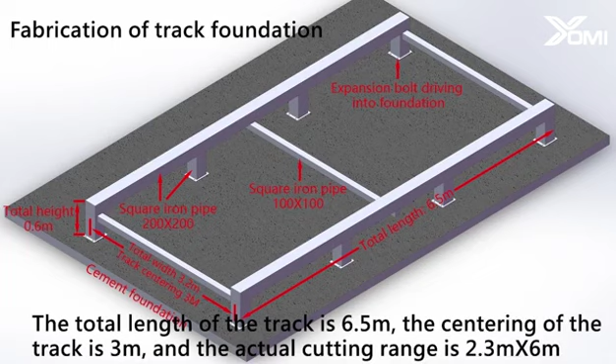First of all, we need to make the foundation of the light gantry cutting machine track. Here, take model 6023 as an example. The total length of the track is 6.5 m, the centering of the track is 3 m, and the actual cutting range is 2.3 m x 6 m. Just do the track foundation according to the diagram.

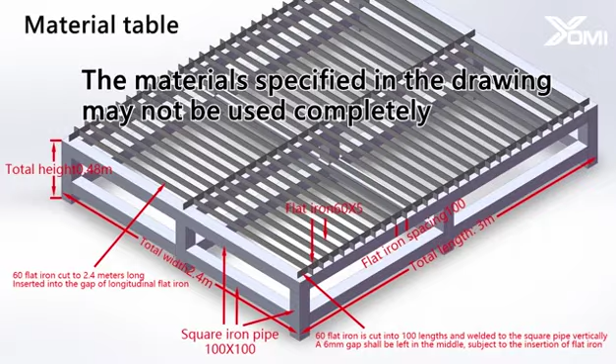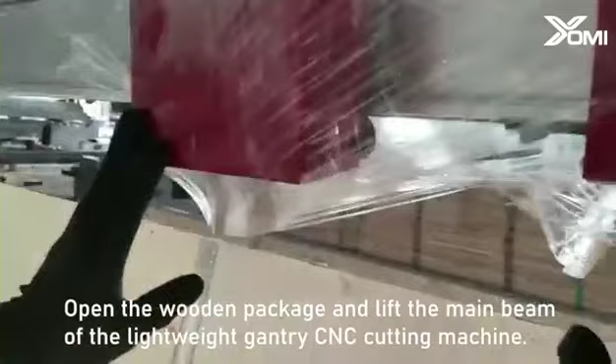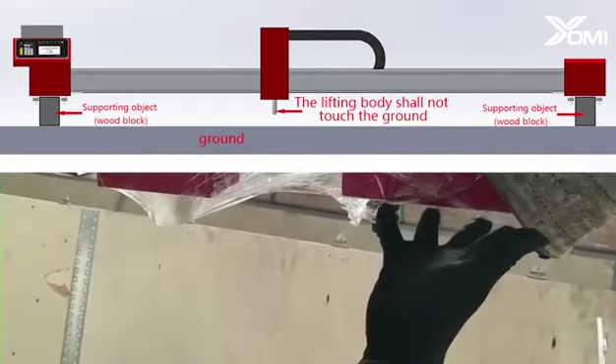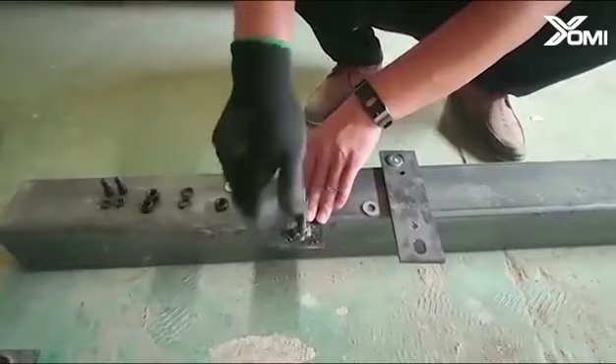Open the wooden package and lift the main beam of the lightweight gantry CNC cutting machine. Place two wooden blocks on the ground to support the main beam. The lifting body must not touch the ground, to prevent touching the parts under the lift and beam. Screw the nut onto the screw of the base. Place the flat pad and then put the mounting board. Put flat and elastic pads and screw nuts. Do not tighten the nut temporarily.

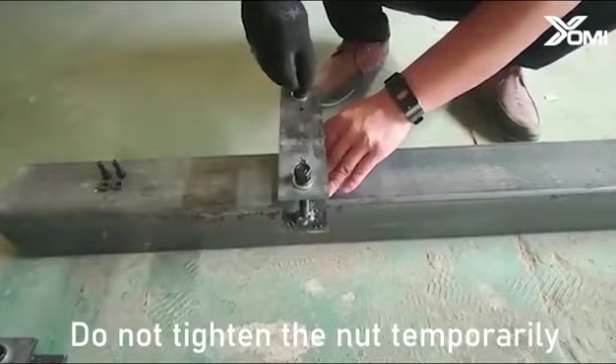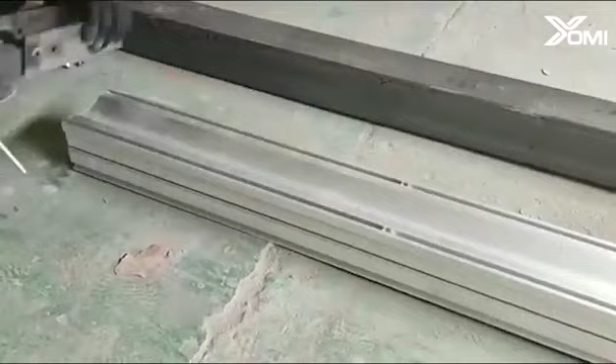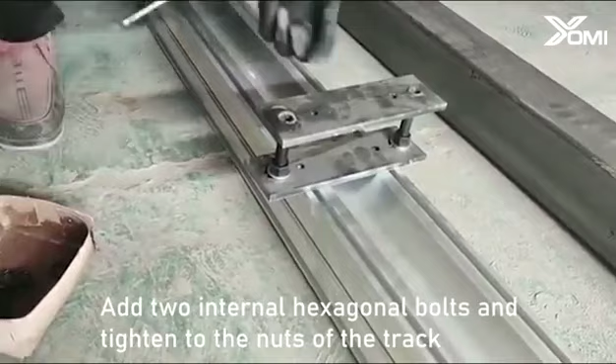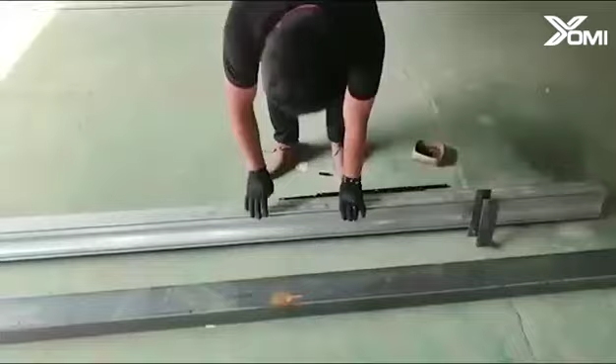Turn the track over. Push the nuts along the gap under the track to about 0.5 meters. Put the movable side of the base down onto the track. Add two internal hexagonal bolts and tighten to the nuts of the track. 3 groups of cushion blocks on each track shall be assembled according to the above method. Turn the assembled track over and put it on the completed foundation.

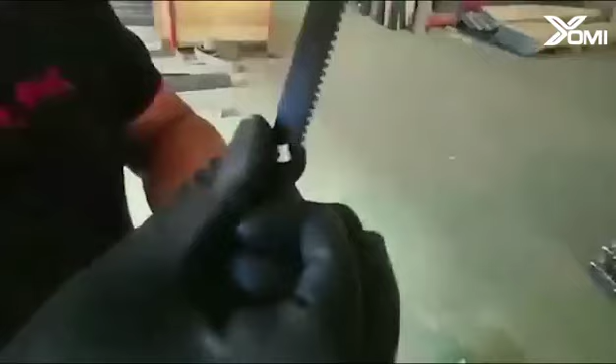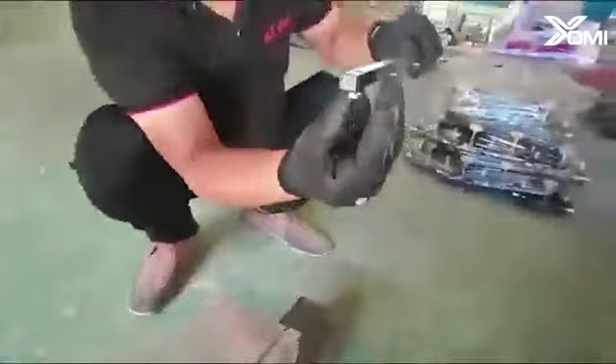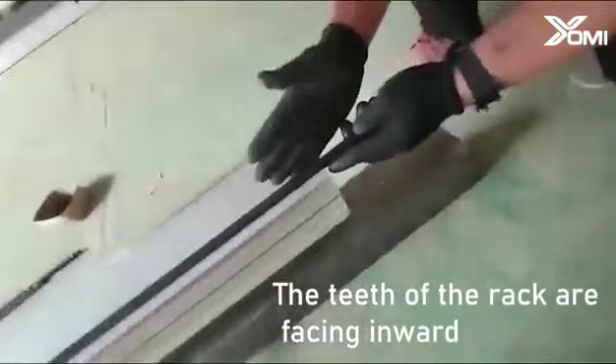Next, start assembling the rack. Release all the small nuts on the rack to the bottom side. Just like this. Adjust the small nut under the rack to be vertical. From here, thread the rack into the track along the gap. The teeth of the rack are facing inward. Assemble all strips as described above.

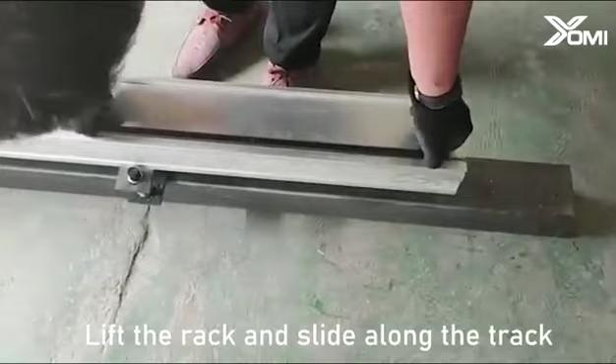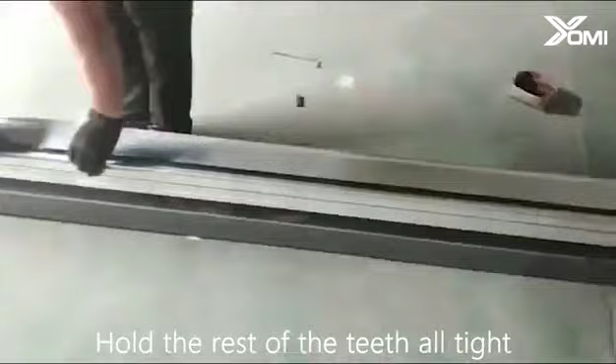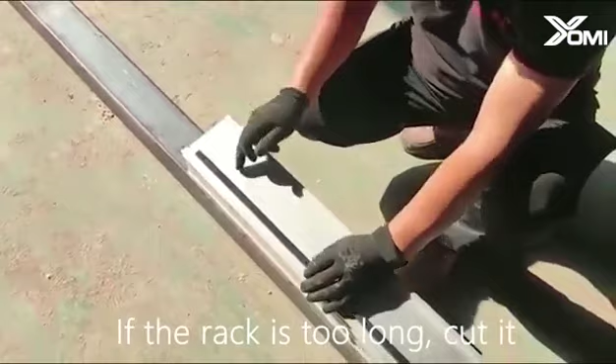Lift the rack and slide along the track. Set aside about 30 centimeters here. Hold the rest of the teeth all tight. On the other side, the rack and the track edge leave 15 centimeters. If the rack is too long, cut it. Press the rack tightly on the track and tighten the bolts on the rack. The rack must be fastened to the track, and each bolt must be tightened.

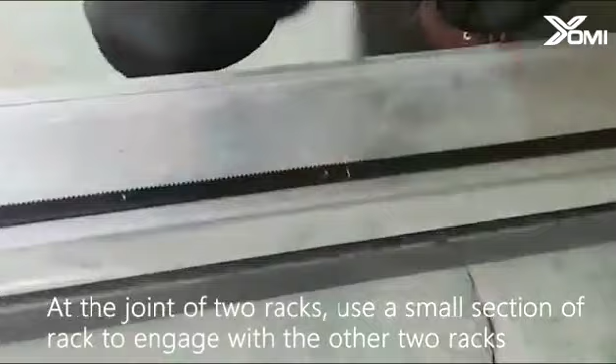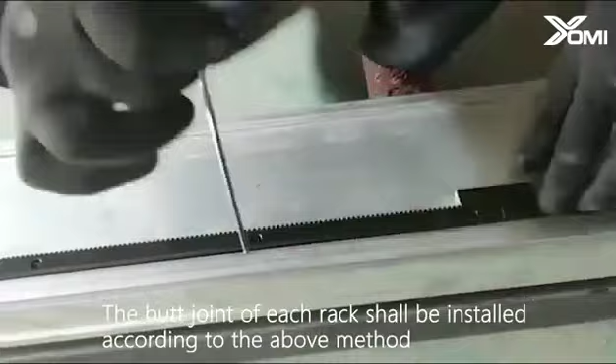At the joint of 2 racks, use a small section of rack to engage with the other 2 racks. Press the small rack and tighten the bolts on the long rack. The butt joint of each rack shall be installed according to the above method. Each bolt on the rack bar shall be tightened.

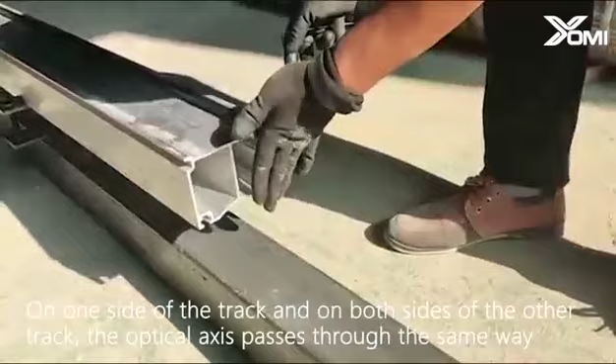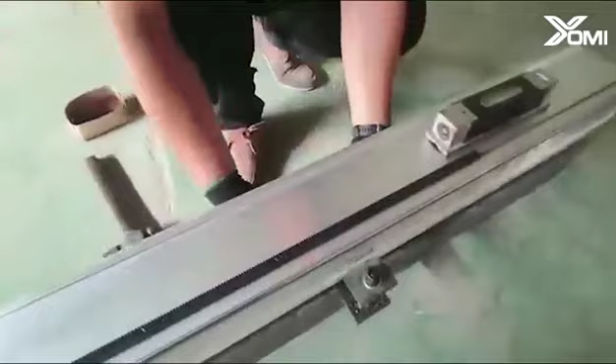The optical axis should pass through this position of the track. On one side of the track and on both sides of the other track, the optical axis passes through the same way. Place the assembled track in the center of the foundation. Weld the base to the foundation. The base on the main track should be welded well, and the base on the secondary track should not be welded first.

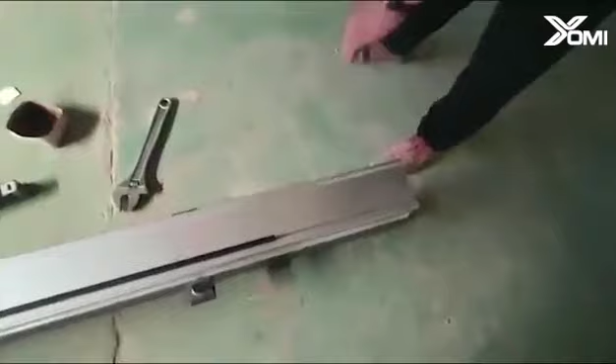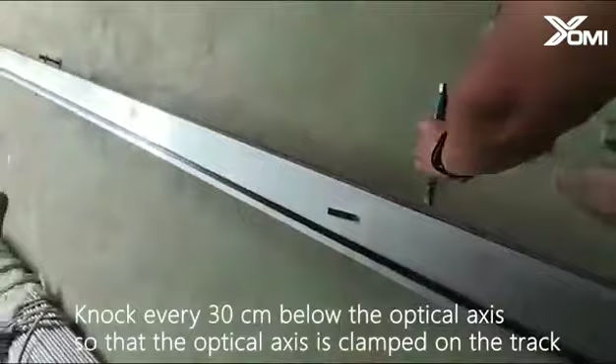Tap the aluminum under the optical axis with a slotted screwdriver to clamp the optical axis. Knock every 30 centimeters below the optical axis, so that the optical axis is clamped on the track. The same goes on the other side of the track.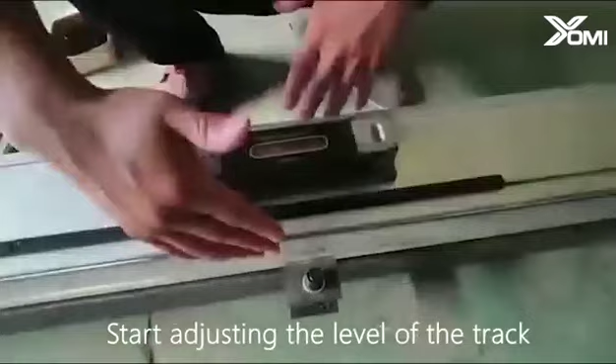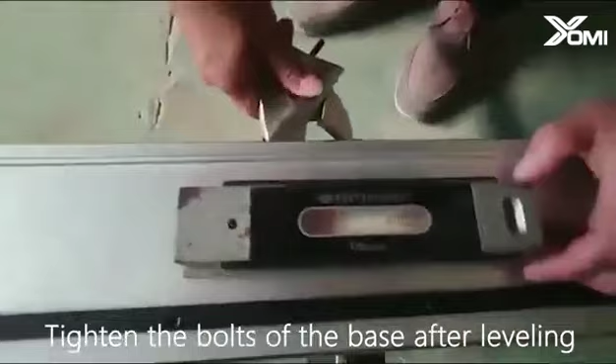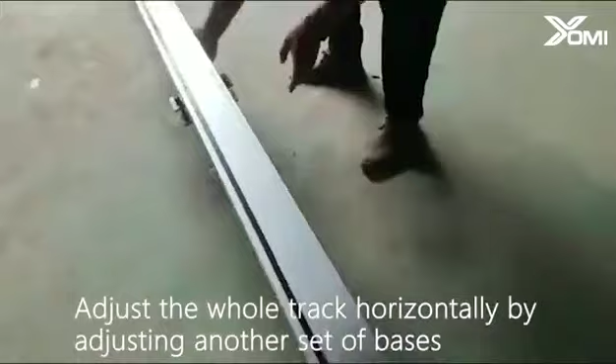Start adjusting the level of the track. By adjusting the 4 nuts on both sides of the mounting base, the track is adjusted to level. Tighten the bolts of the base after leveling. Place the level instrument in the middle of the track. Adjust the whole track horizontally by adjusting another set of bases. Tighten all the bolts on the base.

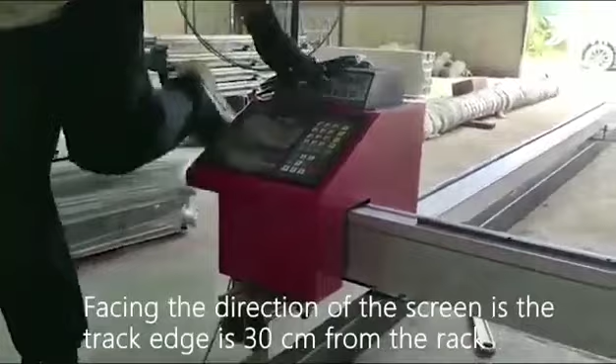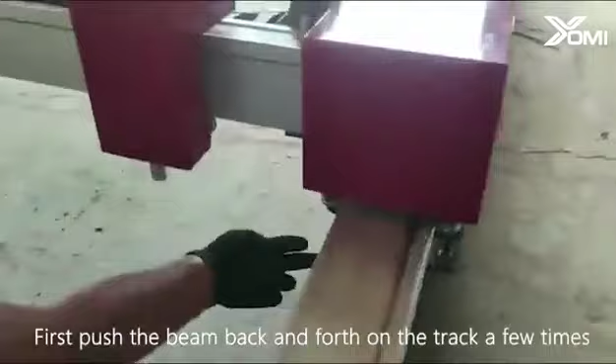Align the U-shaped bearing under both sides of the beam with the optical axis on both sides of the track. Facing the direction of the screen, the track edge is 30 cm from the rack. Push the beam into the track. First push the beam back and forth on the track a few times. Push the beam back to the first base, and then weld it to the foundation. Push the beam to the second base and then weld it to the foundation.

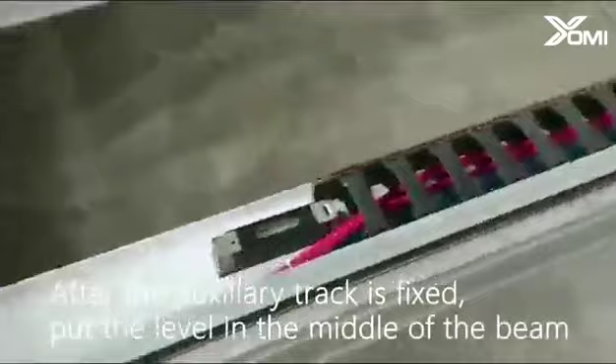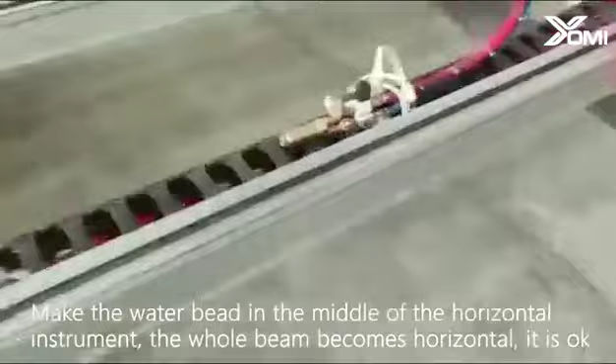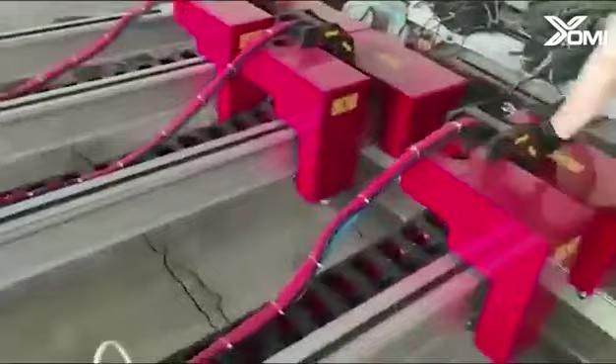After the auxiliary track is fixed, put the level in the middle of the beam. Start adjusting the level of the secondary track. Make the water bead in the middle of the horizontal instrument. The whole beam becomes horizontal, it is okay. Push the beam to another base and adjust the same way. After all the adjustment, tighten the bolts on the base.

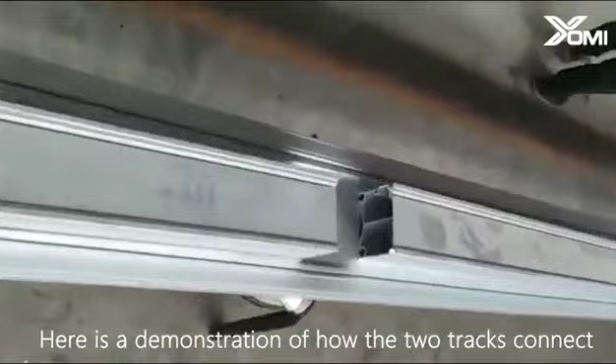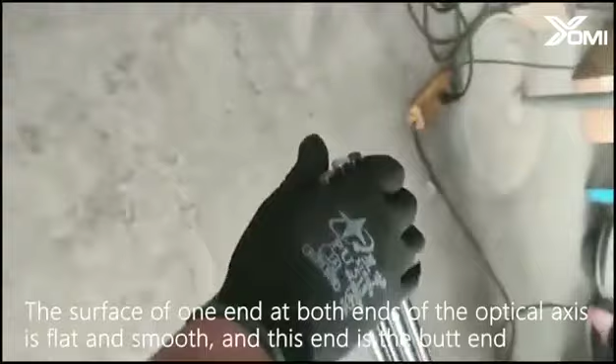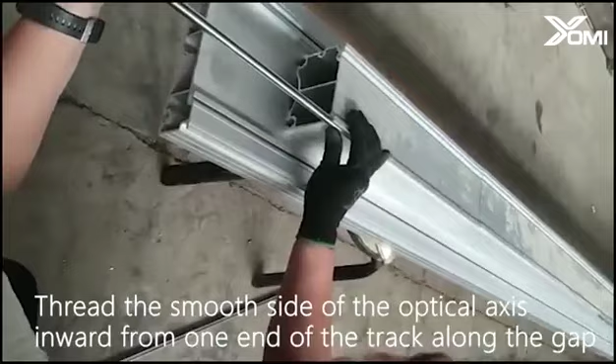Here is a demonstration of how the two tracks connect. Align the two tracks. If the track is long, a line must be drawn on the side of the track as a reference. The surface of one end at both ends of the optical axis is flat and smooth, and this end is the butt end. Thread the smooth side of the optical axis inward from one end of the track along the gap. One end of the optical axis reaches 5 cm into the other track.

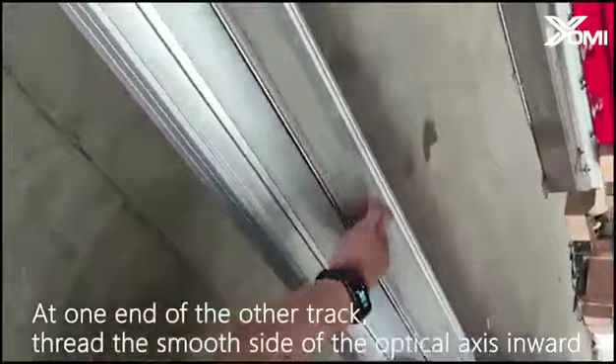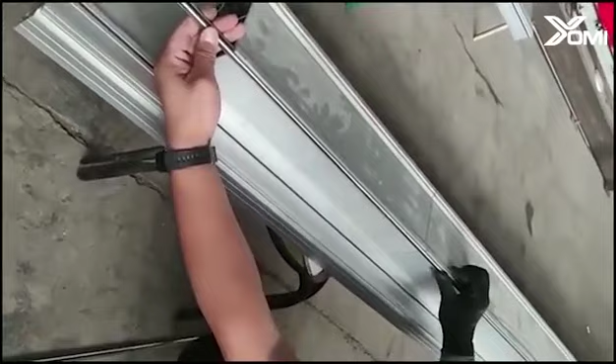At one end of the other track, thread the smooth side of the optical axis inward. Dock it with the other optical axis and feel the smoothness of the joint with your hand. Turn the other optical axis until you feel the seam is the smoothest. The smoother the joints of the two optical axes, the better.

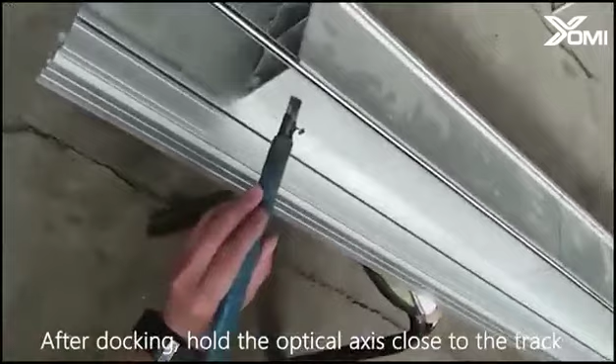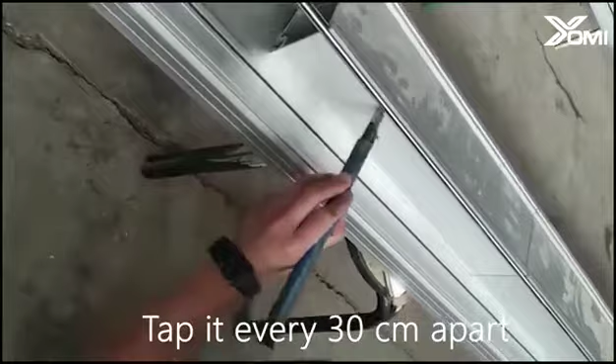After docking, hold the optical axis close to the track. Start at one end of the track. Tap the lower edge of the optical axis with a flathead screwdriver or a flathead iron bar. Tap it every 30 cm apart. Hold the two optical axles tight on the track.